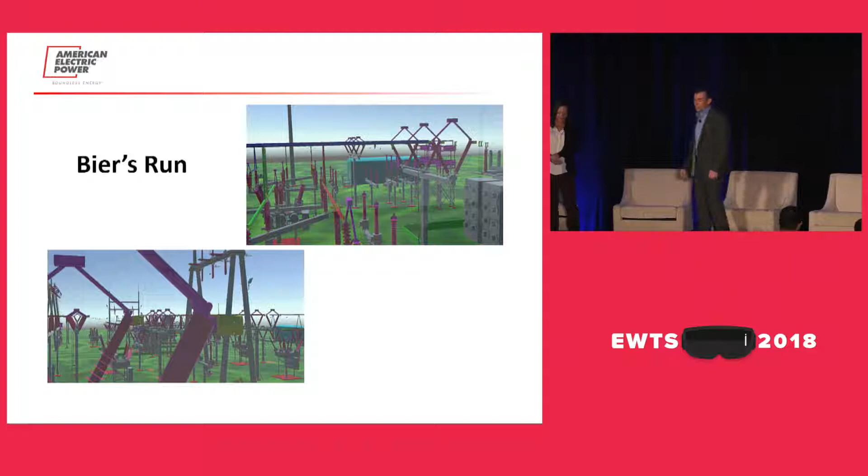So the second prototype we did was for generation, right? They approached us. Now we're starting to evangelize.

We're starting to do a lot of demos. People are getting a little bit excited about it. And so they approached us and asked us, could we simply put in one of our CAD models. Did exactly that. I mean, it took a couple of hours, shoved it in on their heads, right? And they got excited about this.

Again, going back to depth perception and stereoscopic perception, they were able to kind of quickly view and spot issues within this model that they weren't seeing in the 2.5D, your CAD models on your computer screen, or within the 2D designs.

And furthermore, they kind of mused at the idea that maybe as they could walk through, they could do some changes and then bring in their maintenance guys and basically get them to walk through and play act their maintenance routine, right? So now we're discovering ergonomic issues. Poor George has got to come in every Tuesday and do a contortion act with a 50-pound wrench. We can kind of spot those issues.

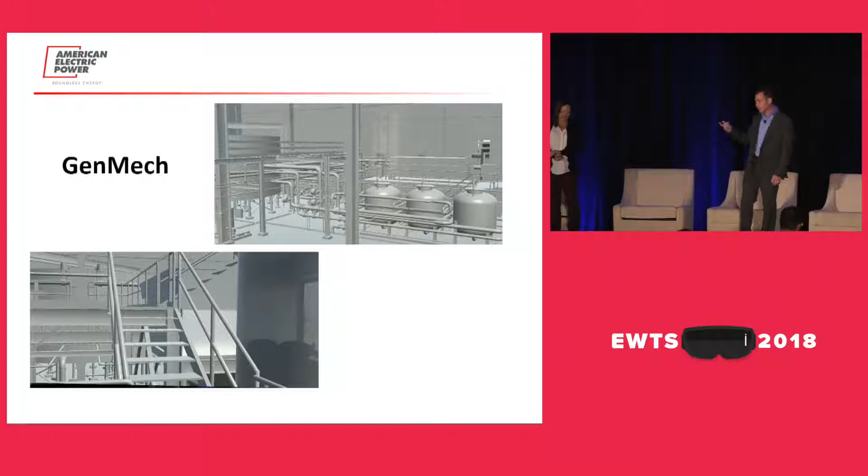So our third prototype was a training demo. And this was, again, more virtual reality on the HoloLens, right? Just to demonstrate the principles and the concepts. For this one, even though this was for distribution, we did notice the classic use case, you heard it throughout the conference, training. And so then we went this route. Again, we slammed it together. It took about a weekend to push this thing together.

And you're just standing in suburbia. You've got a bunch of issues around you. Maybe there's a generator that's too close to the house. Maybe the overhanging lines are too low. And you just kind of click on it, and you can answer the question, and it kind of measures whether you got the answers right.

Sure. So all of these prototypes, fortunately for us, were compelling enough, right, that we did actually get the buy-in we needed, and we were able to get funding for a proof of concept project. And part of that proof of concept project was joining a study that EPRI, or the Electric Power Research Institute, was looking into on augmented and virtual reality in the utility industry.

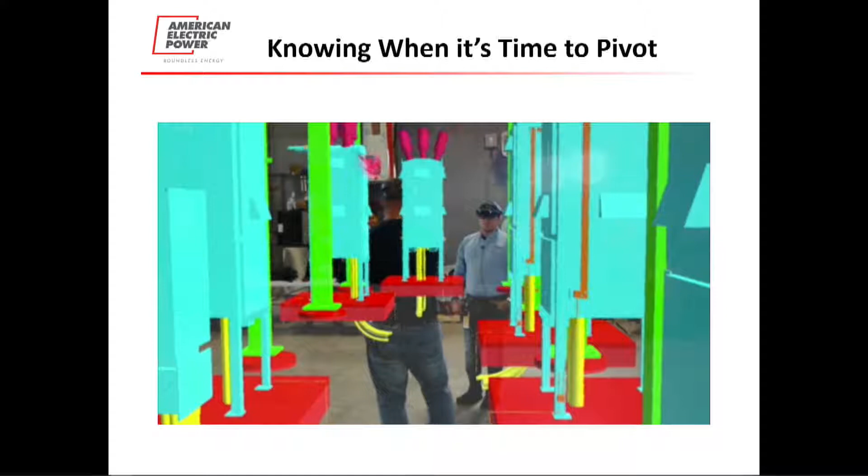Okay. So, I'm entering the substation now. I can now look at it. I can look for the abnormalities I would normally look for, like, say, the missing ground on this stanchion over here. But what's more important is I can actually now look at the orientation of these switches and just how close I have to actually stand to them in order to operate. You've done a great job of adding these pads, so now I can actually see where my feet are in relation to where I'm standing.

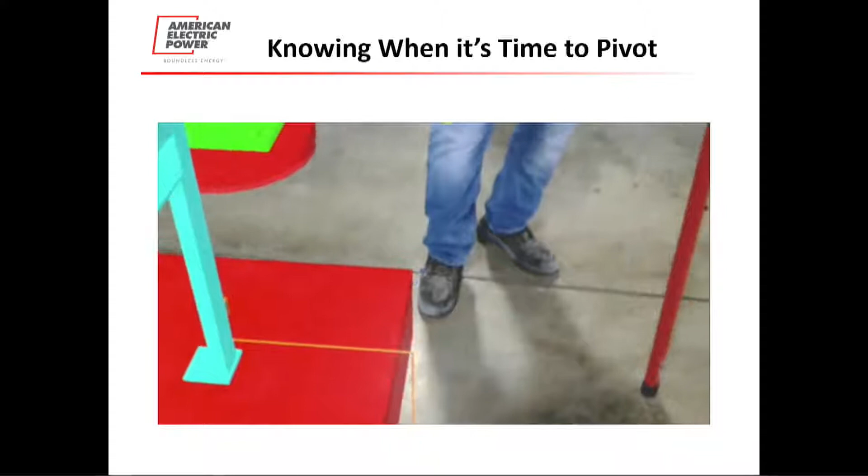Okay, going back to the idea that safety is involved with this, I can actually enter into a world with safety hazards in it without actually putting myself or anybody else in danger. It also allows me to watch what a person is doing and correct problems before they actually go out into the field and recreate those problems. I can correct these actions ahead of time.

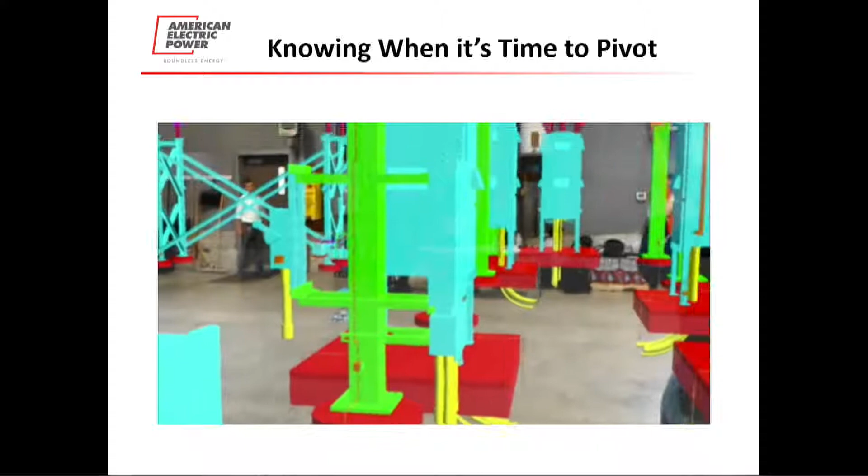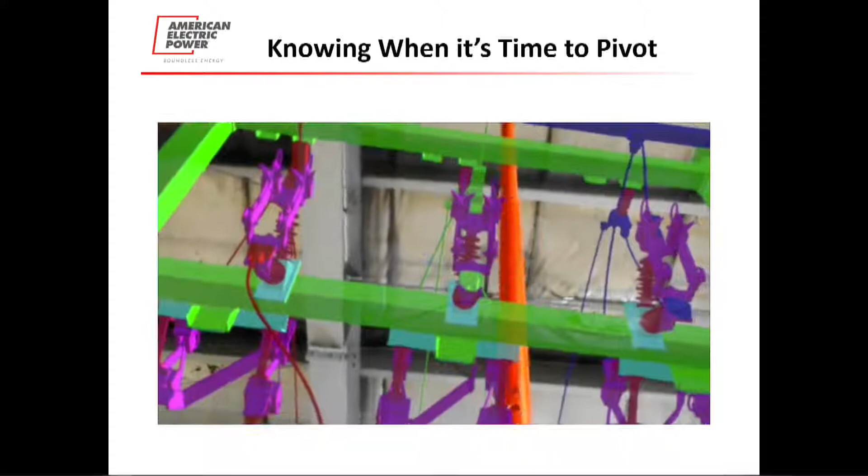We had done an initial run, and he got in there and he critiqued it. I mean, there were some things missing that you wouldn't even see if you were looking at it on 2D sheets. So with him inside there looking at it, he was able to pick up some things that we needed to add to it so he could look at it again. So that was eye-opening for us.

Yeah, so first things first on that one, you don't really see it in the video, and I'll explain in a second, but we actually managed to provide value during a proof of concept. There are three things I like about that. During their collaboration session, like I said, you don't see it, it took about 20 minutes for them to come up with a solution. I don't know if you know what a switching bay is. As you saw there, it's a giant structure that you use to switch off different parts of the substation so they can be worked on.

So the second bit I really like about that was they were taking a real-world object, a hot stick, and using it in a virtual or augmented reality world. And that's pretty powerful. And everyone could kind of see the problem at that point. And if you see there, we gave them a few different configuration options, and that's how they managed to solve it. Like, okay, this is much better.

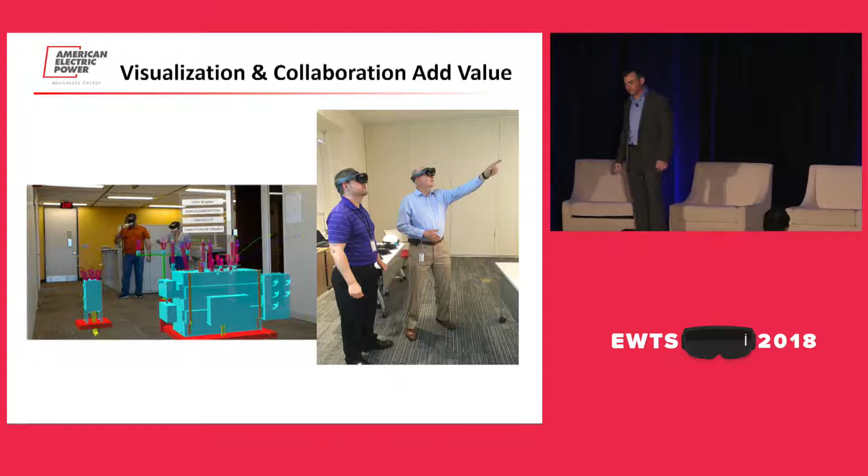Okay, next we'll talk a little bit about enterprising the solution. Can't emphasize enough how important it is to get your safety group, your security group, as well as device management involved as early as possible, make them part of your team. To be able to really push something like this into production, they all need to be at the table very early on. We realized quickly that our team was not just our core development team, but many, many parts of the organization, and they were hugely important because there are a lot of processes, a lot of standards that need to be looked at.

Just a few screenshots of some of the testing we did. We have something called Dolan Labs that were able to do some testing on the HoloLens, as well as the industrial hygienist doing some tests on the DAQRI. So it was a lot of fun, actually.

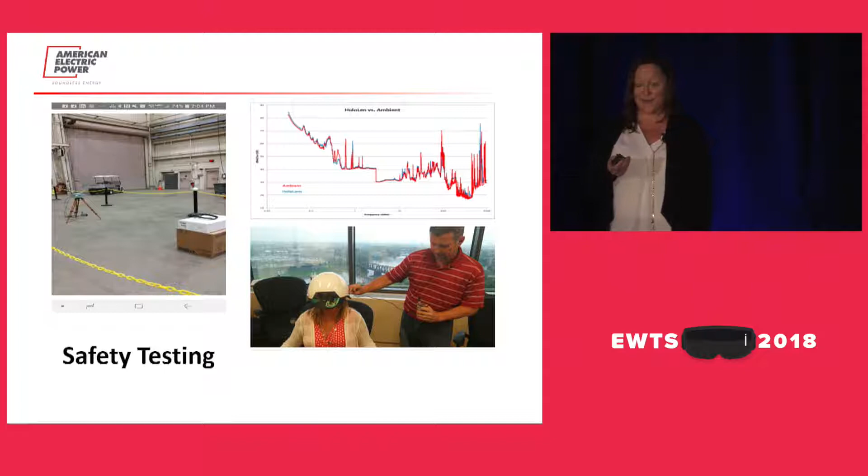Future use cases. So we did a lot of demonstrations. We held a lot of innovation blitzes and events to really evangelize and communicate to people what the devices were capable of, and really all of our use cases came from our end users, right? We feel very strongly that that's where your best use cases are going to come from. They're the ones that are going to be able to help you make those business cases and make sure that whatever you're developing is actually used in the organization and is providing value. So highly recommend that.

Also, idea capture capabilities. You need to make sure that you have something in place to capture all those ideas because they start coming in from everywhere, and you want to make sure you don't lose those. We ended up coming up with over 100 use cases. Now we were able to consolidate those down into different buckets or areas because there were a lot of similar ideas from different parts of the organization looking for similar things, which also helps you build your use case. So out of those 100 use cases, we ended up coming up with several capital projects.

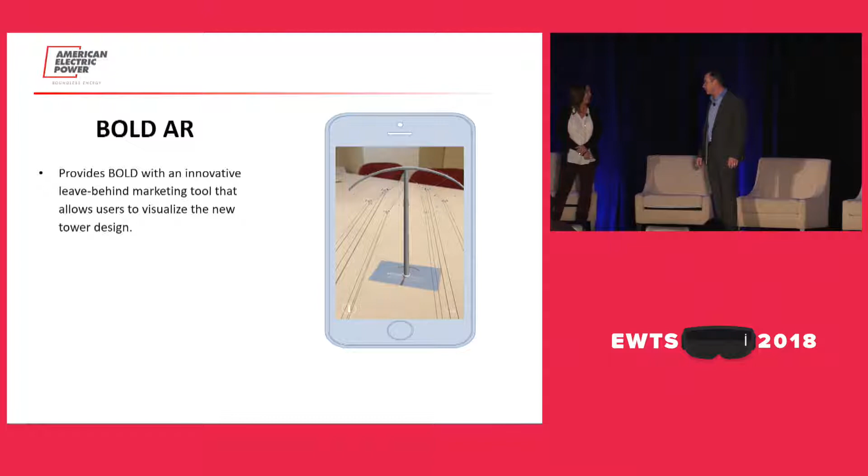I think it's coming out on the store soon, actually. It is, probably within the next week or two. It should be out on the Google and... I reckon we'll get 10 million downloads on that thing.

And last but not least is our station standards project, which is kind of a carryover from our proof of concept, creating a viewer for the transmission station organization to be able to view their models stereoscopically in the HoloLens. With that, we're creating a repository for them to store their models that will be business unit managed. So that makes them independent from IT, and they can manage what models they want to view in the HoloLens, and there will be a collaboration aspect of that as well.

Yep. I think we have a quick video. Quick video, yeah, you've got 12 seconds. So, unfortunately I was going to do a live demo, but the demo gods weren't with us. The thing about casting is sometimes you have bandwidth problems. So we got this video here.

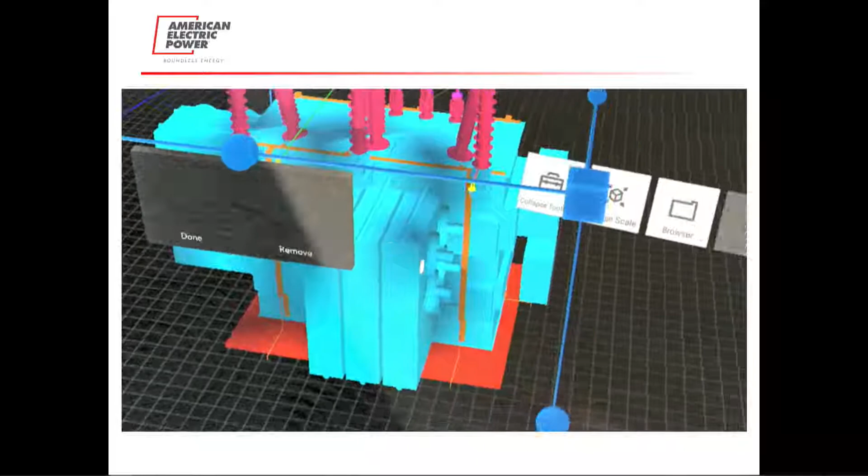What you're seeing is a very simple repository that we created on the back end. The purpose of this is, it often led to the fact that our business units were coming to us to put the models in an app and then pass it back. So we're trying to make our business units independent of us in that step. So like I said, we've got a centralized repository. They can do the bits to the models, put it in there. We've got this viewer that allows them to manipulate and add their models from that little catalog. They can put whatever they want in there. If you see here, just putting it in.

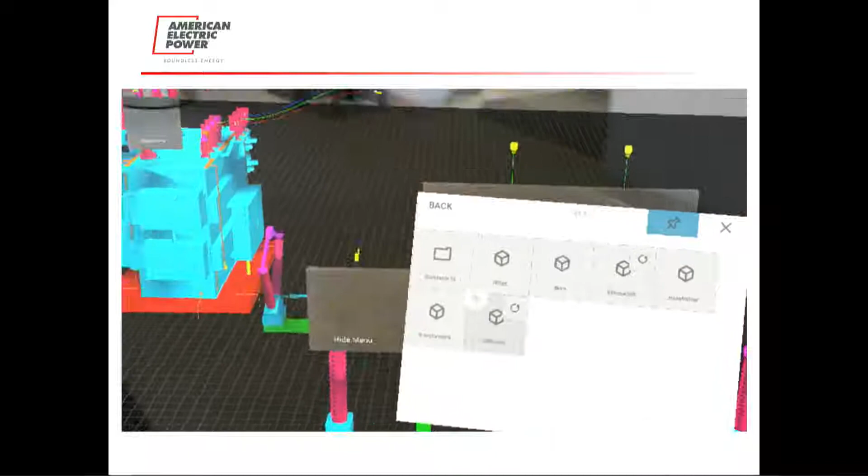I'm sorry if this is making you sick, by the way, because my head moves like crazy. That's one thing about what-I-see-is-what-you-see technology, sometimes people feel nauseous.

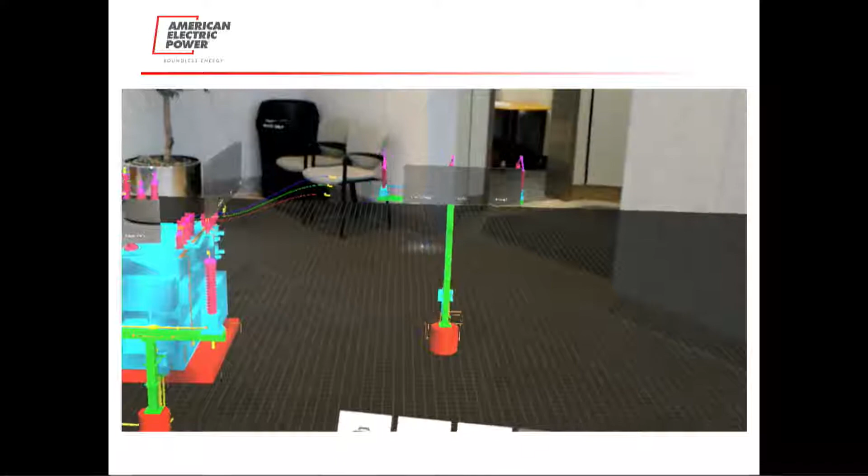Yeah, again, you can just manipulate it, and you can just put it in, I think it'll go to full view in a second. So you've got a little tabletop scaled view, you can walk around it. As Stacy was saying, we're going to make this collaborative, so have these rooms where people can collaborate, look at their models, spot the issues. And yeah, just trust me, you can go to full scale with this thing. Let's have a look. Change scale. There it is, right on time. So that's really all it is at the present moment, but we are expanding it.